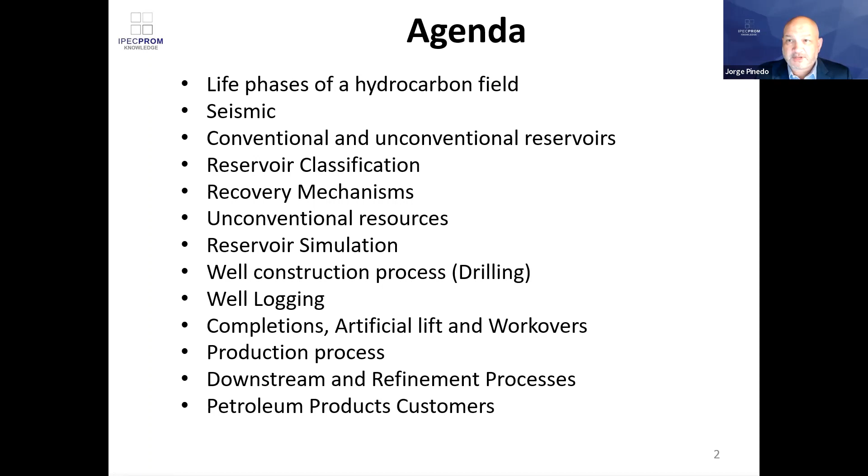Can you hear me okay, Victor? Yes, Mr. Jorge. Can you start?

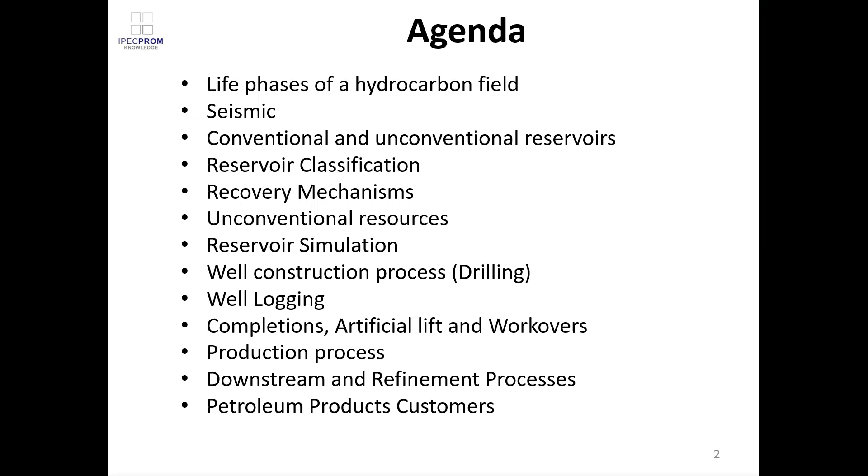Okay, so we'll start with the life phases. In the life phases, what is important to know is how a field moves from resource to reserve and then to production. So here we can see three different phases. First one is exploration, then appraisal, then development and production. What's important to note is that it doesn't matter how much oil and gas we think a company has. At the beginning, if this has not been proven or declared commercial to be recovered, in the exploration phase, basically this is called resource.

So an oil and gas company could have a big acreage, but if they have not done any work in trying to determine a reserve, then it's only a resource. Very important to know, okay? At the beginning, it's called a prospective resource because only some geological reviews have been done. Then doing a bit of seismic, which we'll talk about, some core holes, and a bit more geological review work, you could move from being prospective to contingent, but it's still a resource. Important to know, not a reserve.

Then as we do more work in the final part of the exploration, we could call it possible reserves. And then as we move along in the life of the field, we do some pilot wells, we do some well testing or extended well testing, and then we can talk about probable, and then finally drilling more development wells, we have proven reserves. Why is the definition of reserves important?

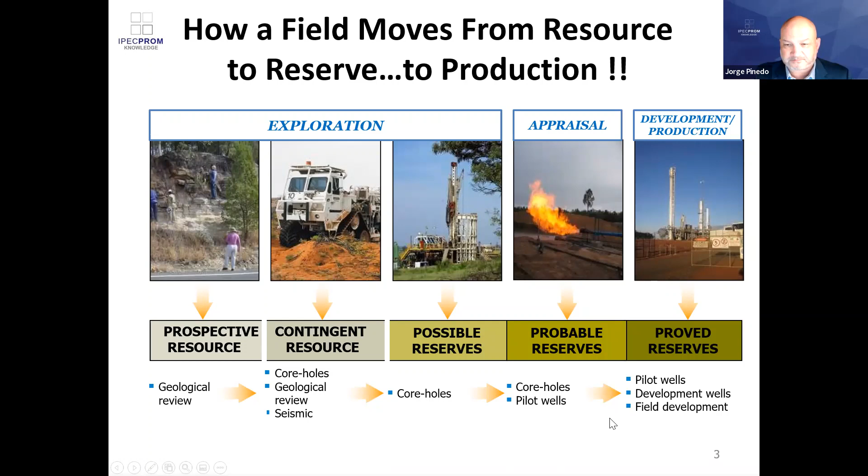Okay, let's talk about seismic. So what is actually seismic? Seismic is basically the process by which we send some sound waves down to the strata, and as it crosses the different densities of rocks, then it bounces, and essentially it gets recorded by a very sensitive microphone, which we call geophone. But really, when you see a map like that in seismic, this is really a map of time, of how long it takes for the sound waves to come back.

From here, very experienced and knowledgeable personnel called geophysicists analyze this data and try to estimate geologically what occurs, okay? But unless you drill a well, it's very hard to determine whether there is oil, gas, how much it will produce, etc. But it's the first part which tells us what geological features lie behind.

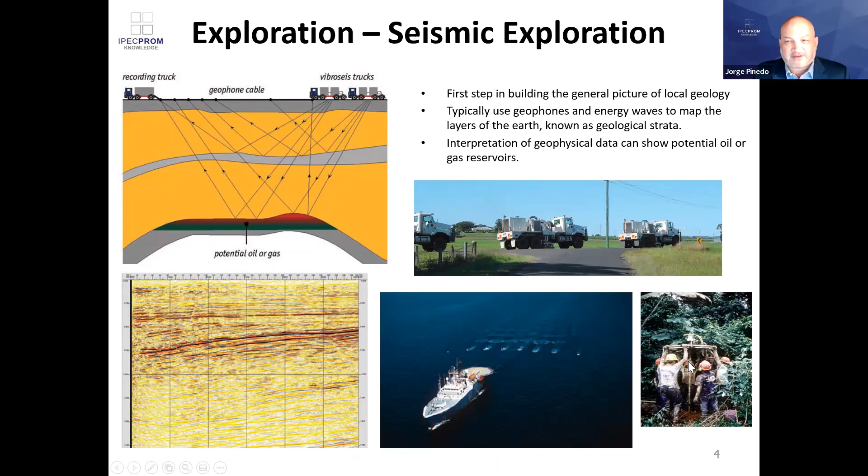Now we'll talk about conventional and unconventional reservoirs. So where do we find hydrocarbons? On the conventional side, we find them in accumulations with sufficient volume in sandstones, which are, as we will talk later, reservoirs that have good porosity and permeability to accumulate the volumes. But also, we have other types of unconventional, like coal bed methane or coal seam gas, as it's called in other places. Tight gas or tight sands.

We have shale. Shale is basically a source rock which does not have any porosity or permeability, but it has a lot of resource hydrocarbon in place. And this, we'll talk a little bit later. The way to produce this is by making permeability in order to produce it by the famous process called fracking.

Now, in a conventional reservoir, what three conditions do we want to occur in order to have an oil or gas volume of sufficient economic quantities? Three things need to occur. First, there needs to be a source rock where the hydrocarbon gets generated over millions and millions of years of high pressure and high temperature. Then the hydrocarbon, in the layer called the kitchen, gets cooked.

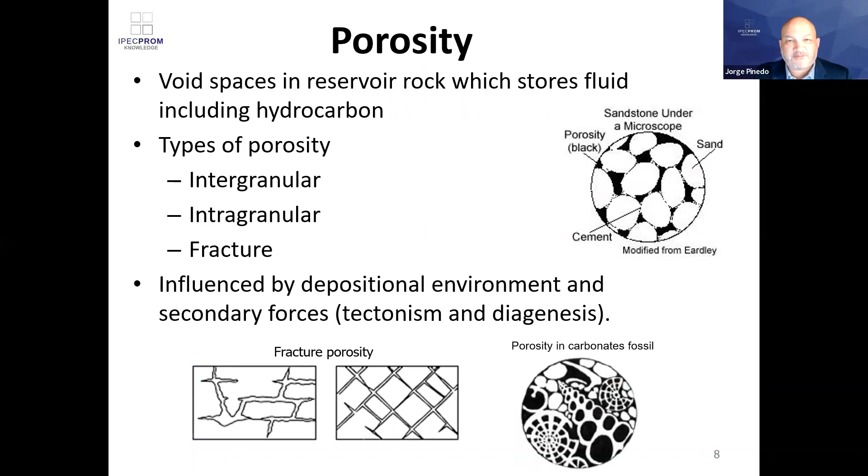The second concept is permeability. Essentially, permeability is the ability to flow from a reservoir. In the case of porosity, we talked about the void space. But permeability is really how well connected these void spaces are. You can have a lot of void space, but not very well connected, which means that it will not flow easily. And that means the permeability is very low.

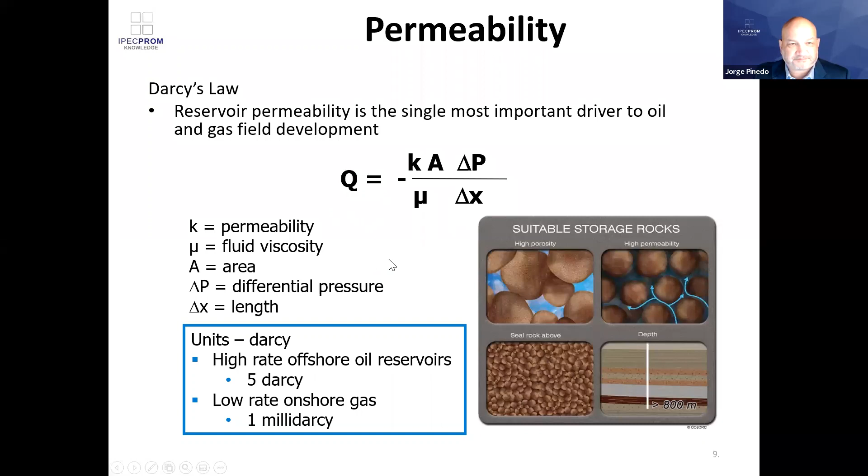In terms of the hydrocarbon reservoir fluids, we have five, which we'll talk about a little bit later: black oil, volatile oil, retrograde gas condensate, wet gas, and dry gas. That goes from the more dense and black, as you can see there, to the lighter hydrocarbon or gas.

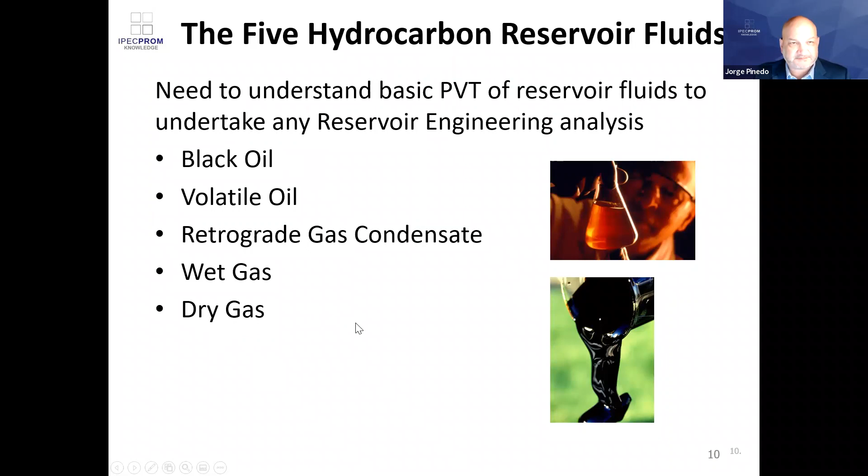Recovery mechanisms. Essentially, in a reservoir, we have 3 recovery mechanisms: primary, secondary, and enhanced oil recovery. In the primary one, the natural energy of the reservoir is basically what drives the production of the field. In secondary or supplemental recovery, we help the reservoir maintain its pressure, because the longer the pressure is maintained, the more the field will continue to produce.

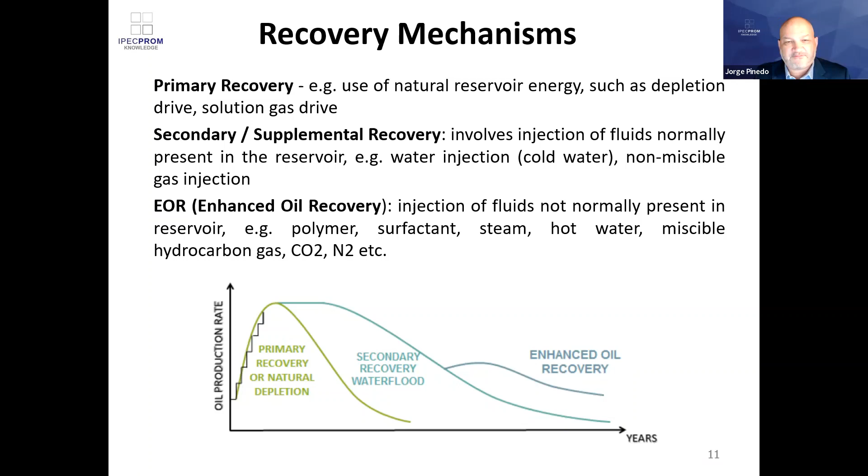And finally, tertiary or enhanced oil recovery, as it's also called, is basically further technologies like polymer, surfactant, steam, and other products that get injected in order to try to recover more production. As you can see in this plot, the primary recovery is basically the first one that gives some recovery. Then, for example, in this case, you use a water flood or water injection wells to produce even further. And then enhanced oil recovery. Enhanced oil recovery projects normally need a bit more investment and have long-term payback.

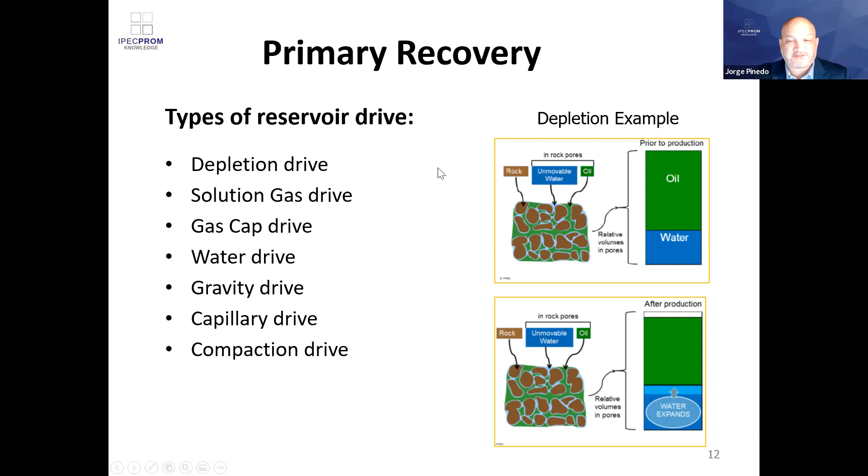Examples of primary recovery: we have depletion drive, solution gas drive, gas cap drive, water drive, gravity drive, capillary drive, and compaction drive, all naturally occurring primary recovery mechanisms. In terms of secondary recovery, we have water injection, gas injection, and also gas recycling.

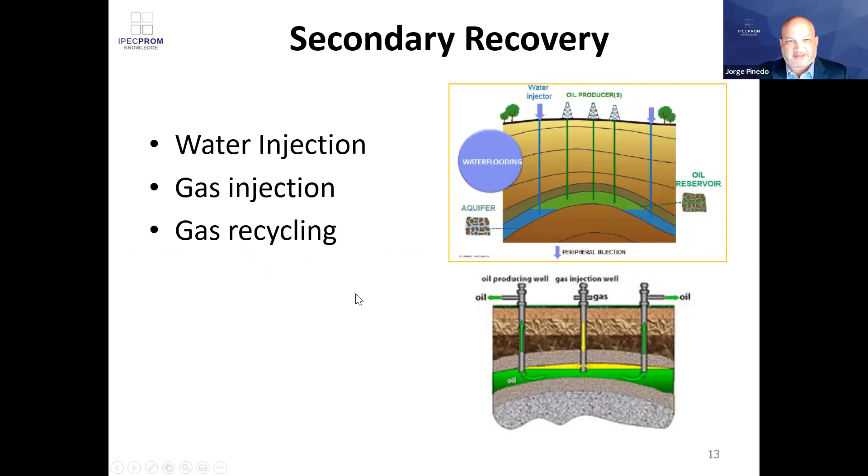Let's talk a little bit more about unconventional resources. We have many options. Let's start with the ones that we already talked about. Coal seam gas or coal bed methane, which is the gas that comes out of the coals. We have what we already spoke about, the shales, which are famous because we can frack them to make permeability so they can flow. We have tar sands and oil shales, like for example in Canada.

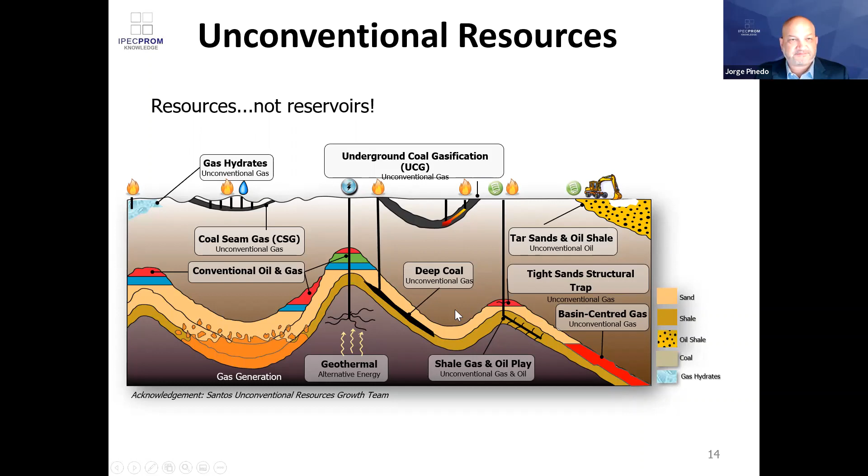We have deep coals with unconventional gas. We have underground coal gasification processes in which you basically burn gas in coals and produce a synthetic gas product. We have geothermal recovery, which is where you inject water in a very deep well. The heat of the earth will turn that water into steam, and then you can use that steam to generate energy. And finally, we also have gas hydrates, all unconventional resources, all basically available with different techniques around the world.

Let's talk a little bit about reservoir engineering tools. We have mainly two. Now, with the advances of computation, reservoir simulation is really a lot simpler and a lot easier to do.

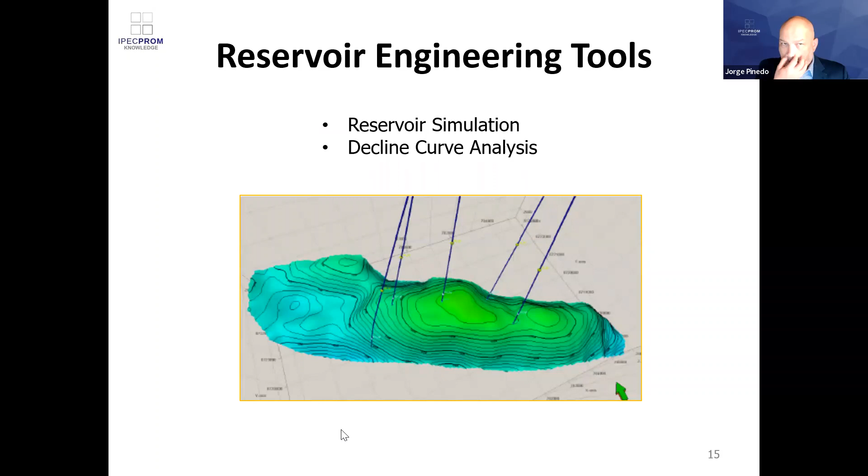And we also have another technique called decline curve analysis. So let's talk about reservoir simulation. Essentially, you bring all the reservoir properties, all the reservoir layers, stratigraphy, the reservoir structure and geometry, fluid properties, pressure conditions, saturations, well geometry if we have any existing wells, and you put all that together and try to represent it in a mathematical model.

What do we get with our simulation model? First, after we calibrate, we will be able to predict the future of the field without any additional wells or with additional wells. Also, this helps us identify what oil or gas may be bypassed, and therefore it helps us determine the optimum locations for future wells to be drilled.

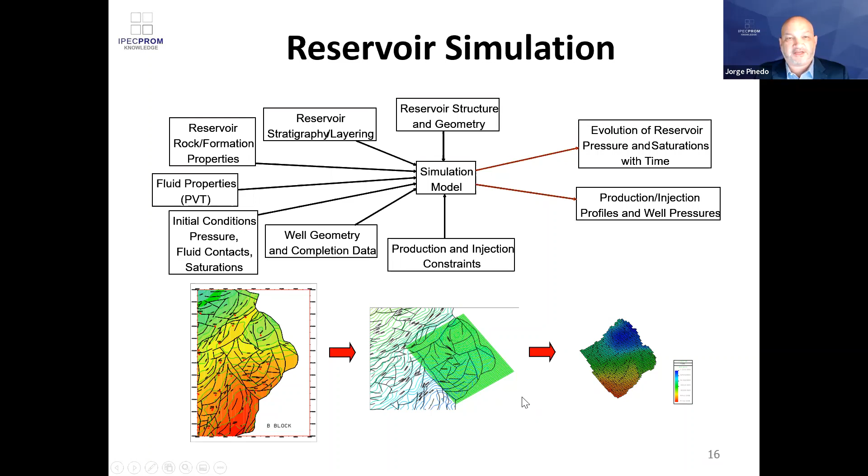In an oil field, for your information, there's no rate by which you can determine that the field will be uneconomic. What I mean is there are other conditions, like oil price and operating costs, that really determine the economic limit, not the rate limit of a field.

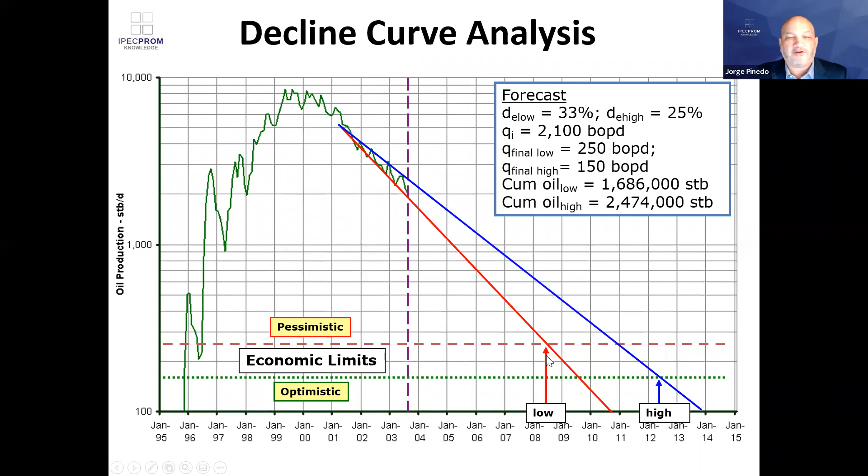Okay, let's talk a little bit about wells. A well has a long, variable life cycle, starting from the drilling of the well. It can then be stimulated. It can be flowed back. A completion could be run. A connection could be done. A commissioning of facilities could be happening, and then we start operating.

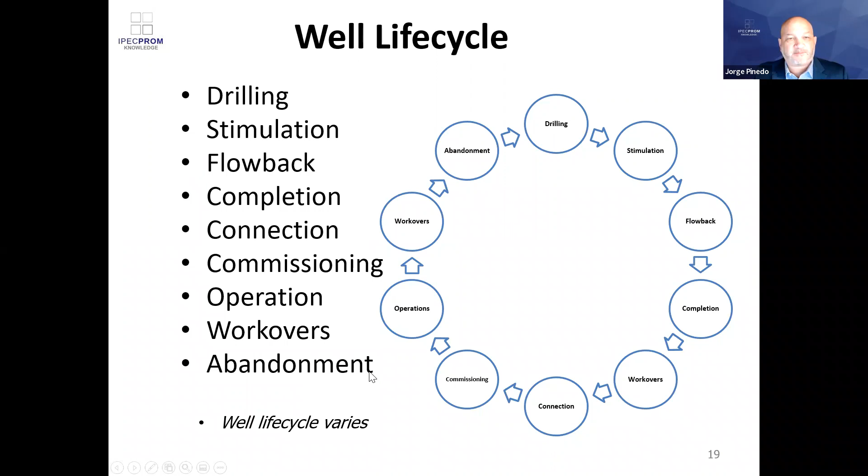But that's not the end. It will need some maintenance and some enhancement in terms of workovers to keep the production going or to enhance it. And then finally, it will reach its stage of abandonment. So those are basically all the different phases that a well can go through. In terms of petroleum wells, what is a well? It's basically the general term for any bore through the earth designed to acquire hydrocarbons.

So in terms of wells, we have different types, but essentially it's the same well. Wildcat, if it's in an area where there has never been any known oil or gas production. Appraisal wells, when you're trying to determine the productivity of an area. Exploration wells, where you're trying to simply find or confirm information on areas.

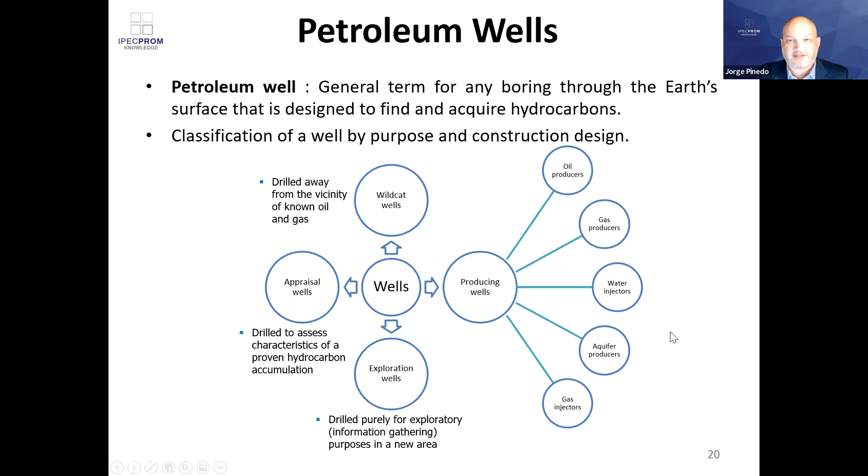And then we go into producing wells, in which we can have oil producers, gas producers, water injectors for pressure maintenance, aquifer producers if we need to get some source of water for water injection, for example, and also gas injectors. Those are all the different oil, gas and water producing well types.

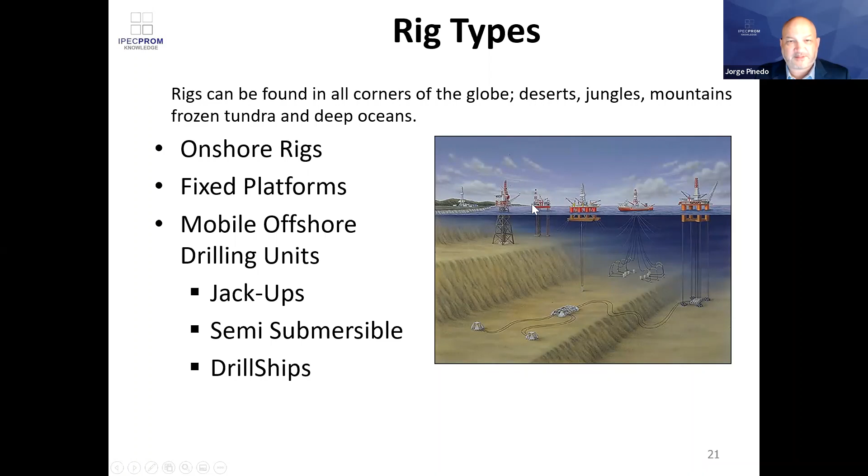Rig types. So what do we have? For drilling rigs, we have onshore rigs, we have platforms from where drilling occurs. We have mobile offshore drilling units, such as jackups for waters up to a depth of 100 meters. Semi-subs and drill ships can take us basically to further depths. But those are different types of rigs.

Now, in terms of rig components, the main components are four. We need a power system to be able to give energy to all the system. We need a hoisting system to lift all the equipment that needs to go down in the well. We need a rotating system, which basically helps the drilling process through the bit. And we need also a circulating system, which will help us recover the drill cuttings as we go down into the reservoir.

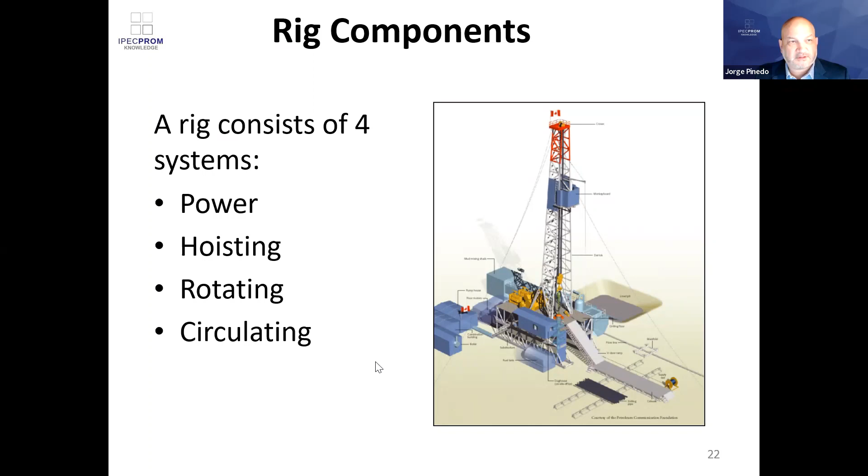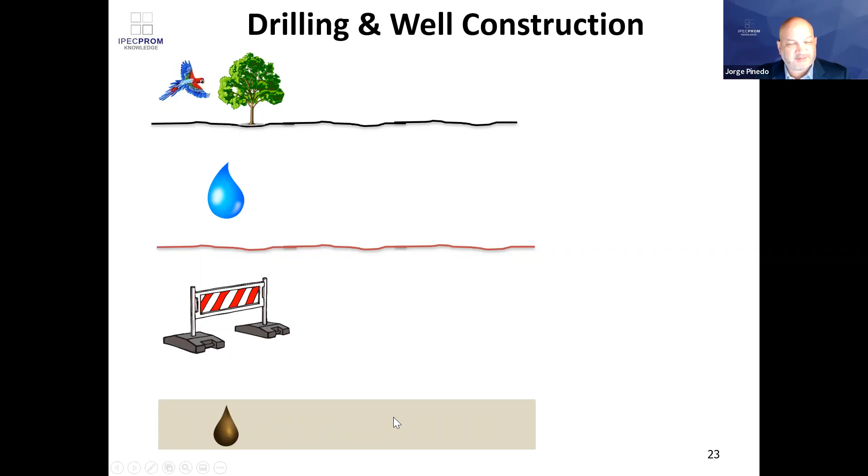Okay, we will now talk about how a well is drilled and constructed. So we have here our representation of the surface by a bird and a tree. We have a first layer, which could be an aquifer. And we have now an intermediate layer, which is basically trapping the hydrocarbons, and the hydrocarbon layer is the one that we're trying to reach. So we get a drilling bit and we start the process of drilling a well. So what's happening as we start making hole in this well?

Well, there's an equation that you probably know, which is pressure is equal to density, gravity, and height. So essentially, as we drill the well, we have two pressures that we observe. One pressure is on the well and the other pressure is on the reservoir. So the pressure of the formation is P2, and P1 is the well pressure, which will be the density of the fluid that you're using to drill, the gravity, which as we know is constant, and H is the depth.

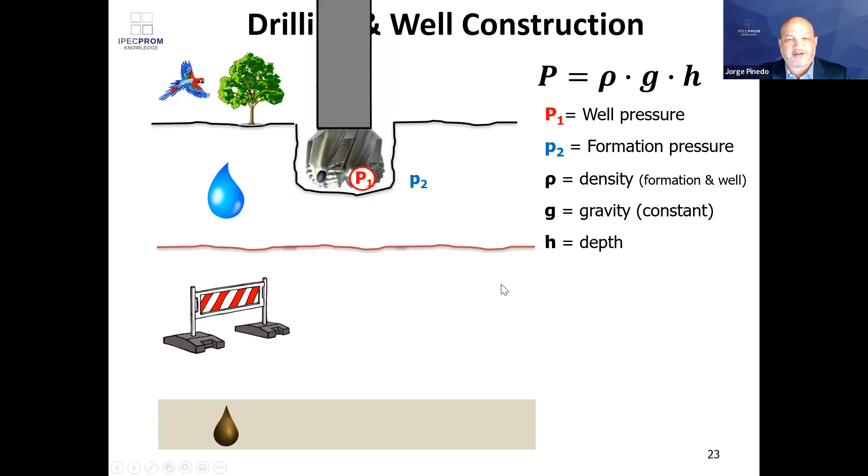So the idea is to keep, as we drill through, a balance between these two pressures so that the following conditions can be prevented. If the pressure of the well is higher than the pressure of the formation, fluid from the drilling of the well will go into the formation. If the pressure of the well is less than the pressure of the formation, then formation fluid, in this case water from the aquifer, will go into the well, and we don't want that. So the idea is to keep both formation and well pressures at an equilibrium as we continue to drill.

So in this case, we continue to drill and we reach the bottom of the first layer. Now, because the pressures on this layer are different to the pressures on that layer, we want to secure this phase of the drilling. And what we do is we run a metal pipe called casing in order to isolate this area before we can continue to drill into a different type of formation and different pressures. So we run the casing, which is basically a pipe. We run a set of plugs with cement in between.

We apply pressure into the upper plug, and then at a rated pressure, the center of this plug will break and allow the cement to be distributed evenly all around the casing. And following some pressure tests and logs, we confirm that the cement is well around the casing, giving us a good bond between the casing and the formation, and therefore we will not have any leaks or any problems, and then we're able to continue to drill to the next layer.

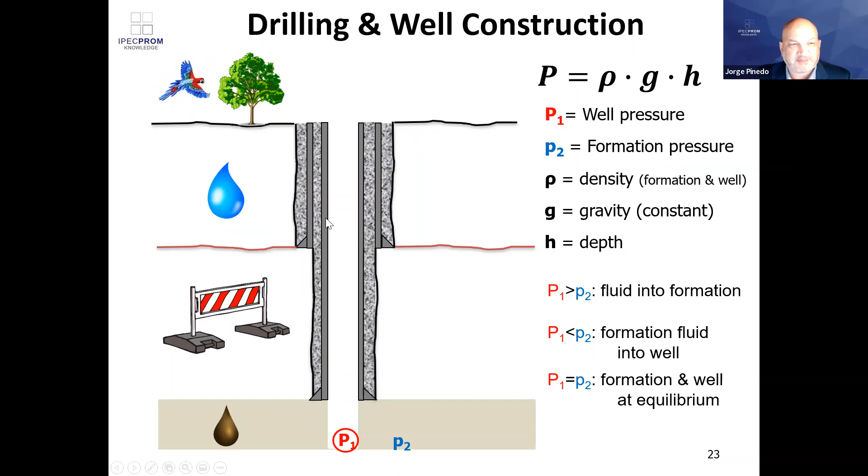Having this integrity is very important for the entire life of a well to make sure that it doesn't have any problems. You don't have to be an engineer to know that if there's any problems in this integrity of the cement, for example, the hydrocarbons are gonna try to find the easiest path of flow, which could not necessarily be through the wellbore, but actually behind the casing. So to avoid that, we basically ensure that the cement jobs and the casing jobs are done correctly.

Directional drilling basically is just a concept to confirm that depending on the location of the drilling rigs and depending on the objective or the target reservoir, we may need to do some extended deviated wells, S-shaped wells if they're coming from a formation, or J-shape if you want to do some reaching away from a platform.

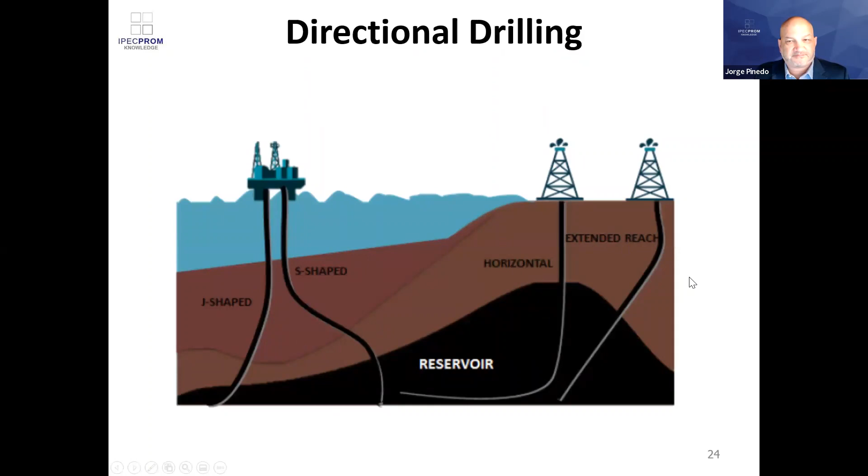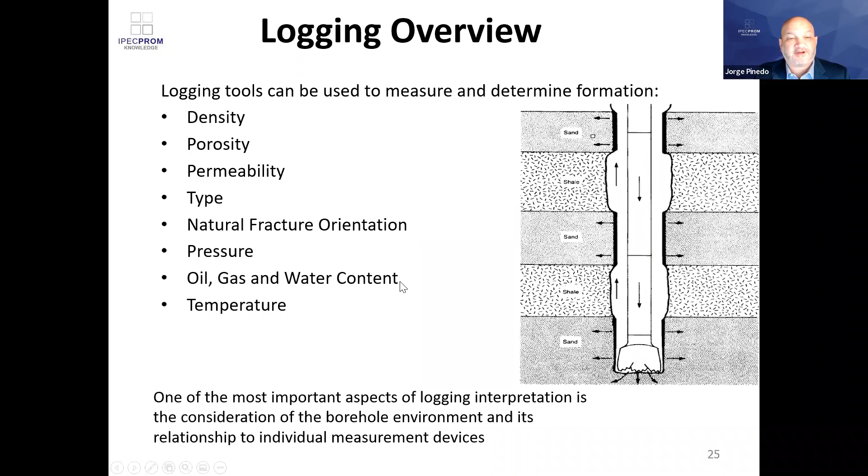Okay, now we'll talk about logging. Logging tools can be used to measure and determine the formation density, porosity, permeability, type of layer, which way the natural fractures orientation is going, pressure, oil, gas, and water content, and temperature. And this is more than just squiggly lines. This well logging, which is of three types: the geological logs, mud logs, and geophysical and petrophysical logs, is what helps us determine where is the oil, where is the water, and what we can do.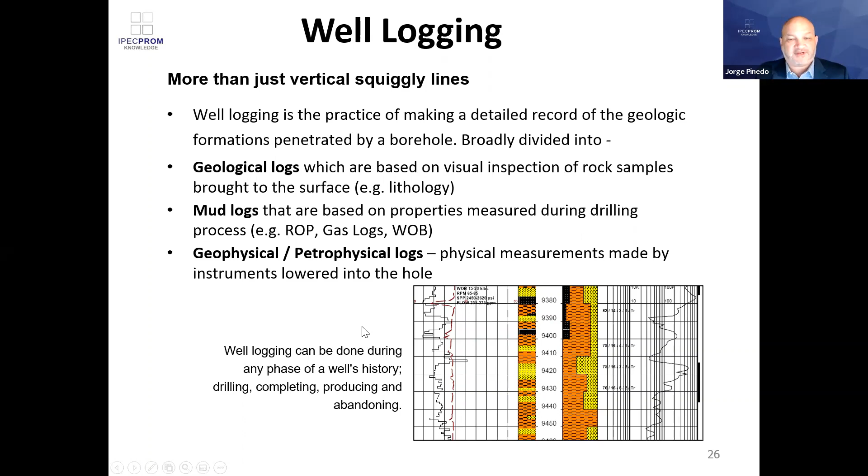The process is very simple. You drill the well, you lower a tool to the bottom of the well, and you basically pick it up slowly. And as you pick it up slowly, you're reading the different layers and hydrocarbon contents of a well.

Now let's talk a little bit about well completions, artificial lifts, and workovers. In terms of completion types, we have an open hole completion where the formation is basically strong enough so it will not collapse, and therefore we're able to produce the well without any issues. However, if we have a formation that is unconsolidated, then we need a way to minimize the solids from the layer coming into the well and potentially blocking it. And that's why we sometimes run what we call slotted liners.

Now, if the sand formation is very important, then we need to run a process called gravel pack, which essentially is running a screen with a sand of engineered size, which basically helps us produce the fluids while keeping any formation solids from coming into the well.

Finally, conventional, probably one of the most popular: you cement all the intervals and then you do what you call a perforation, where you create holes through the casing, through the cement into the formation in order to produce the fluids. And finally, you may want to also have other options such as a perforated cemented liner, in which basically the casing has gone through, and you already decided that the casing will have a screen from which you can produce. So these are the different completion types.

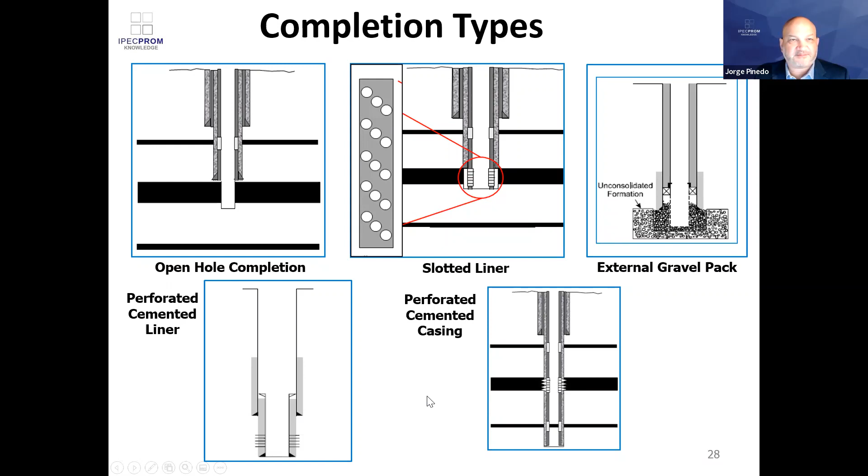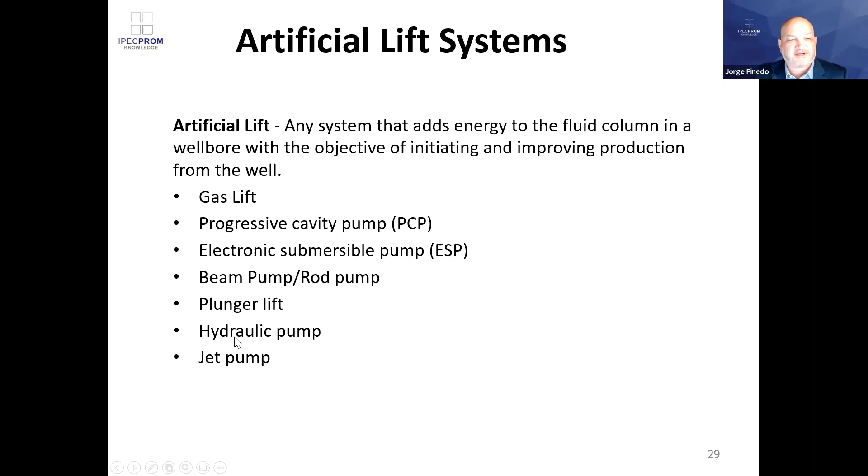Artificial lift. What happens here? Well, basically any system that adds energy to the fluid column in order to produce. This normally happens when the energy of the reservoir doesn't last long enough, and we need to help it. So we need to have different types of artificial lift. The most popular ones are gas lift, PCPs, ESPs, and beam pumps. But we also have other ones such as plunger lift, hydraulic pumps, and jet pumps. We'll talk about 2 or 3 of them at the moment.

Beam pumps essentially use a surface beam and a crank assembly to drive a downhole piston. Now what happens is this piston or cylindrical device goes down into the well, captures a section of oil and sometimes water, and then lifts the fluid to the surface. And by a continuous movement, it basically is providing help to the fluid in the well to be produced.

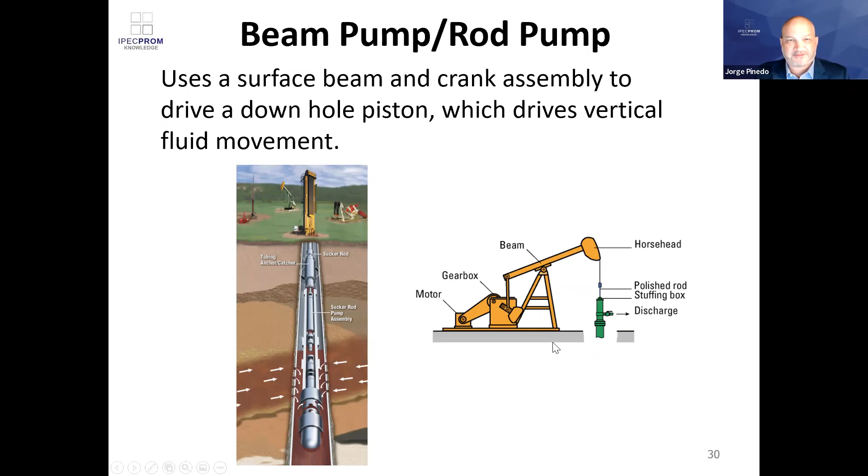Gas lift: if you remember the equation of pressure, density, gravity, and height, what happens here is we have a situation in which the weight of the oil column gives pressure higher than the pressure on the reservoir. So what we do is try to minimize this pressure on the wellbore, and we do that by reducing the density. How do we reduce the density? By injecting gas. This can be done with what we call gas lift valves, which basically help inject gas that comes down through the casing into the well, making the column of oil lighter, and then being able to produce the well.

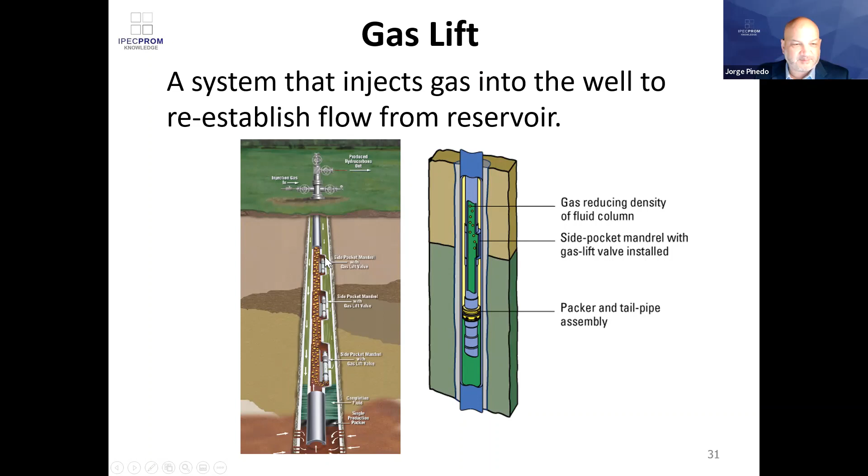And ESPs, or electric submersible pumps, are basically a pump attached to an electric motor. We run it downhole, and then we give it energy so that the well can produce for a lot longer. If we leave it to simply produce on its own, it will probably die very soon. This is normally used as well when we have, for example, the first stages of water production. As the water comes into the well, the weight of the column will be higher, and it will prevent us from producing substantially. This is where we run these ESPs, these pumps, to basically produce larger volume.

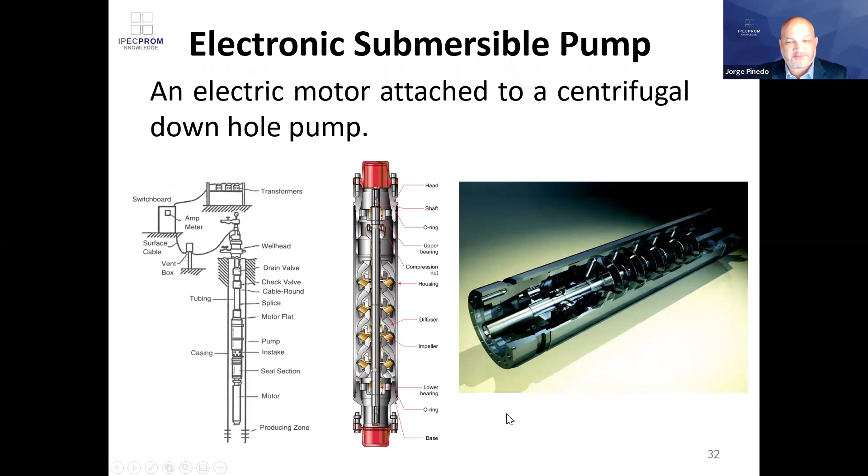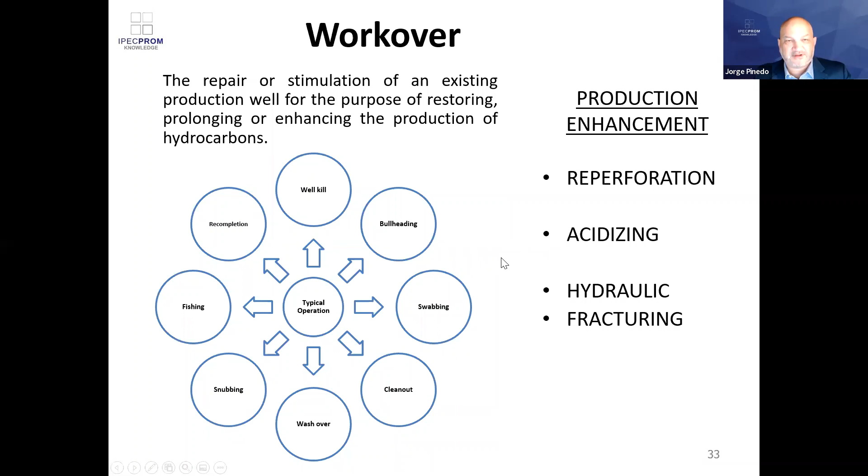Workovers. What is a workover? A workover is basically a repair or a stimulation of an existing production well for the purpose of restoring, prolonging, or enhancing the production of hydrocarbons. So we have different options here. We can kill, we can bullhead, we can swab, we can clean out, wash over, snubbing, fishing, etc. But essentially, for the purpose of production enhancement, we have three types: reperforation, acidization or acidizing, and hydraulic fracturing. These are activities that are done in order to enhance the production of a well.

In terms of equipment and tools, we have coiled tubing, which is essentially a very long steel hose. It's normally about 2-inch diameter and can be used for pumping down a well, normally a deviated well. It's not really used for a vertical well. We have flowback units, which are small units that help us clean up the well. And rigs can be small for this on land, for example. A snubbing unit basically allows us to recomplete the well, run in hole, or pull out existing completions without the need of having the well in a killed status. It basically allows you to work on a live well. And for that, you need a set of slips that come in with the snubbing unit.

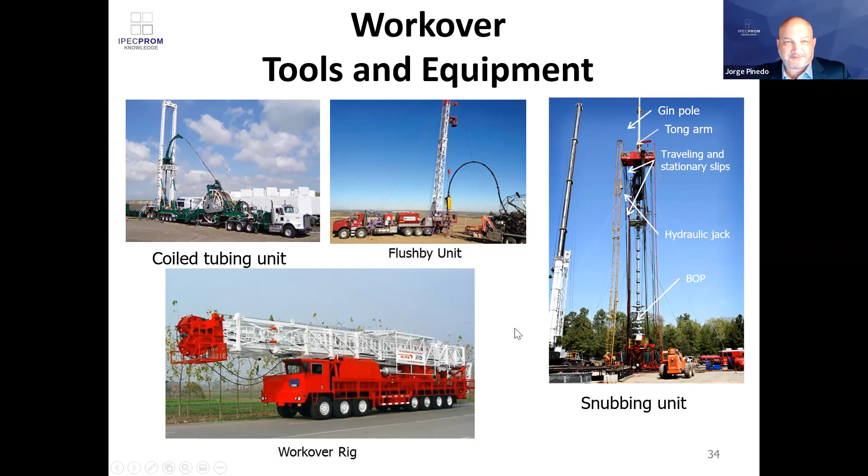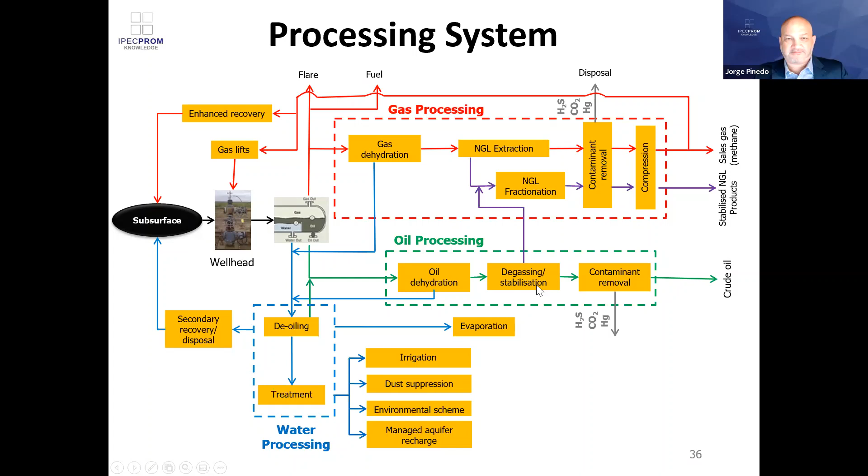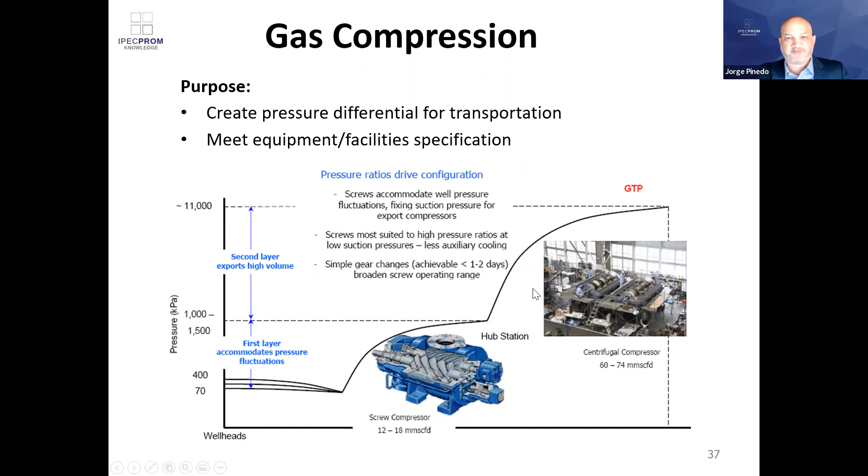Gas compression: essentially what we're trying to do in gas compression is raise the pressure for transportation or to meet the requirements of the facility specification. We have different types of compressors. We have screw compressors for smaller volumes, and we have centrifugal compressors for larger volumes. But the idea is to raise the pressure, in this example from 70 kPa all the way to 11,000 kPa, which is normally the required pressure for gas pipelines.

Water, what happens with the water? Well, in some countries it's still allowed to use evaporation ponds when the volumes are not significant, or for beneficial use, which is more the case these days. It can be used after cleaning for irrigation, for industrial uses, for dust suppression, for local irrigation. It can be reinjected, as we mentioned before, into secondary recovery mechanisms, and the idea is also to have environmental surface discharges.

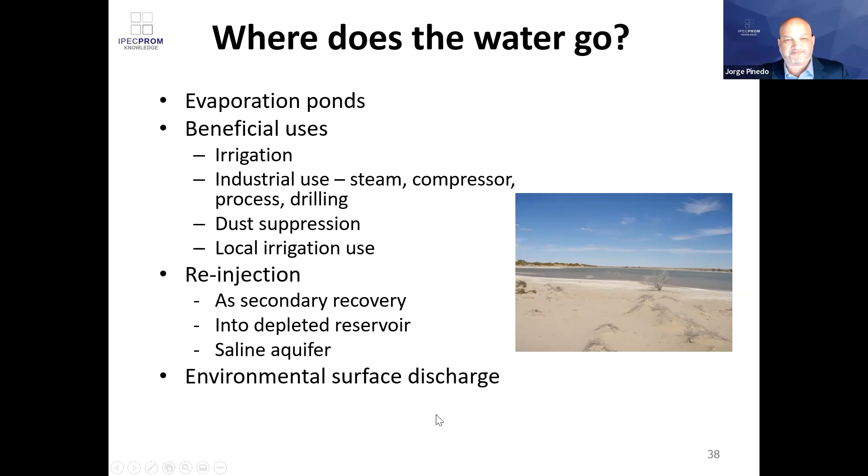Gathering systems, something very forgotten, which are really the flow lines that connect the wells to the facilities, compressor stations, etc. So as you can see, we have different types. They really depend on the field development plan, the topography of the terrain, and other considerations. So we can have central systems, axial systems, branch systems, and loop systems.

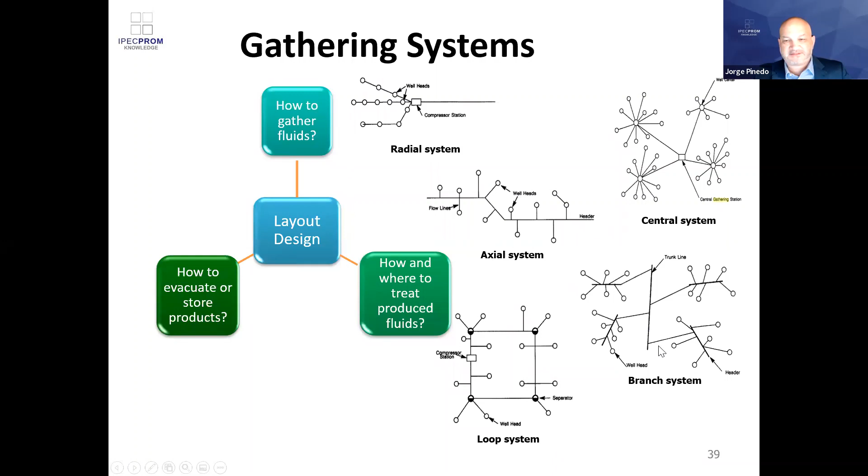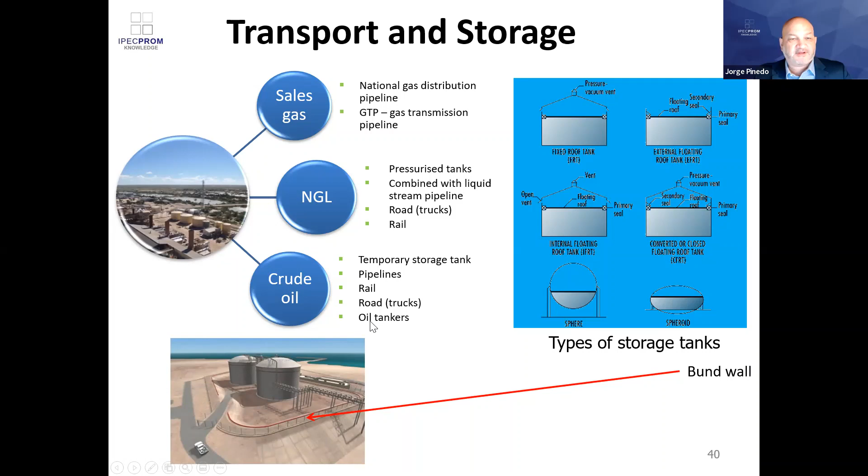Transport and storage. We can have a national gas distribution pipeline. We have gas transmission pipelines. In terms of NGL, we can store it and transport it in pressure tanks. We can combine it with liquid streams. It can be trucked on the road and also on trains. Crude oil can go through temporary storage tanks, pipelines, railroads, and also offshore oil tankers.

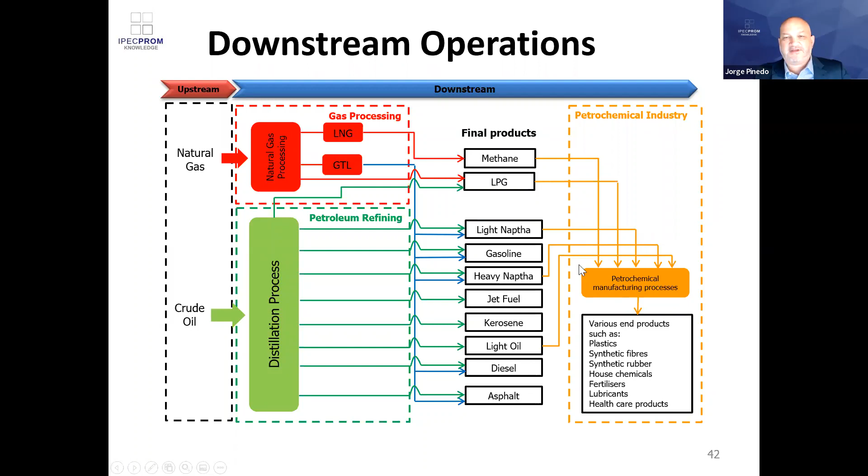Now let's talk a little bit about downstream processing and facilities. In terms of downstream operations, we have gas processing and petroleum refining. In terms of gas processing, from natural gas we can get LNG and gas to liquids, which basically give us final products of methane and LPG. And then we have the petrochemical industry, because from all that gas, and obviously some of the stuff from the oil, we can get plastics, synthetic fibers, fertilizers, lubricants, healthcare products, etc. From the crude oil, the distillation process allows us to get naphthas, gasoline, jet fuels, kerosene, diesel, and other heavy products that also go into the same petrochemical industry.

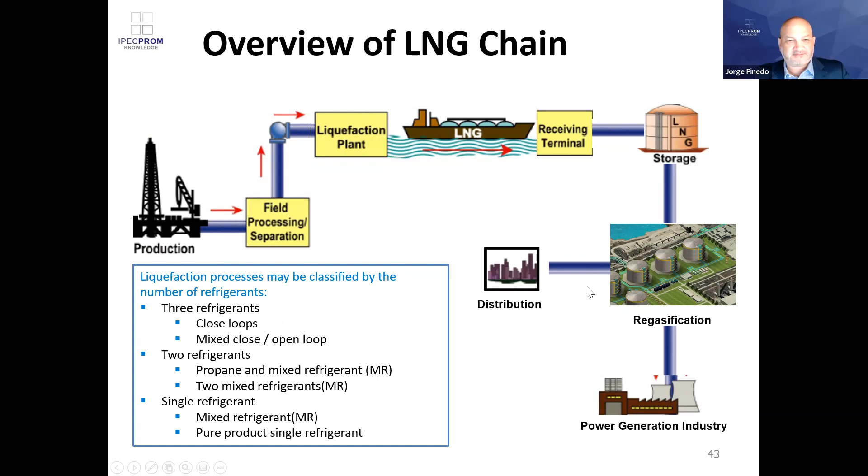What's an LNG chain? Well, in terms of LNG, what we're trying to do here is transport the gas, but the way to do it is we put it through a process of freezing it in an LNG plant and turning it into a liquid. Once it's a liquid, it's very stable. It can be put on LNG tankers and sent to what we call receiving terminals, where the liquid gas is heated up again and regasified, and then it can be used again as gas for a power generation unit or any distribution that may be required.

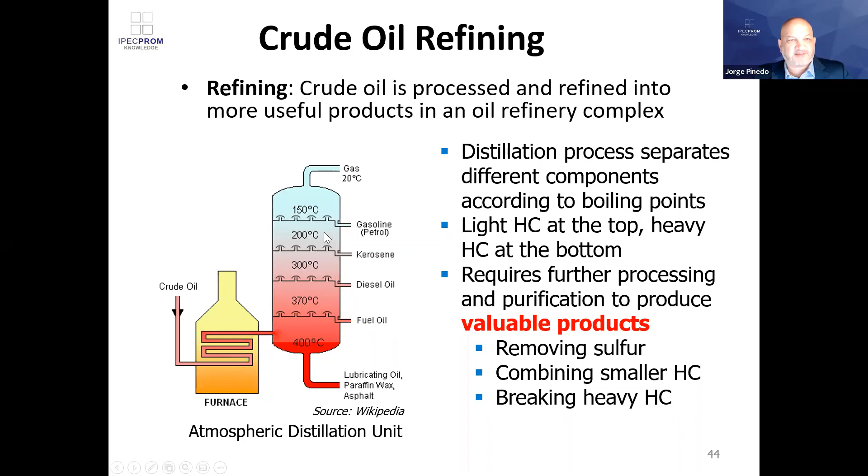Crude oil refineries, how does the refinery work? Essentially, the process is very simple. We get the crude oil to go through a furnace, and then into a tall tower; the temperature at the bottom is close to 400 degrees centigrade. As it goes up the column, its temperature profile changes, and depending on the different levels of temperature, we can extract the different products. In this example, gasoline from 150 degrees, kerosene from 200 degrees, diesel from 300 degrees, etc. And any heavy ends basically become asphalt. So that's essentially what happens in a refinery: you heat it up, put it through a tower, and as it goes up and cools down, you're able to extract different products.